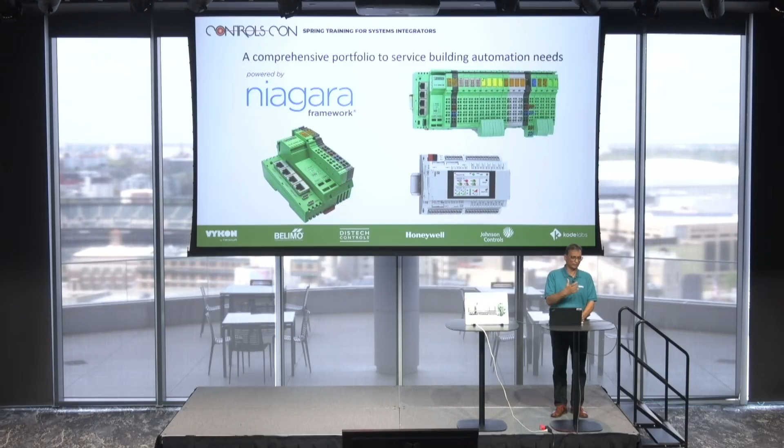The controller that you see here is, in the industry, you are very familiar with screw-in connections, right? We have moved away from screw-in connections, and we have spring cage connections that save a lot of time in wiring and putting the cabinets together. And don't be mistaken thinking that, oh, okay, spring cage is not sturdy. These controllers are tested for factory automation. So these are UL 508, which is now 61010. So all our controllers are 61010. They're not 916. 916 is a subset of 61010.

So all our controllers are tested for the G15 vibration rating, which is in fact because you have hydraulic machines and you have a lot of high vibration equipment. So our equipment is tested for high vibration. So these spring cage connectors, don't be fooled, this is to save your time.

We have another unique feature in our green controllers, which are ILC controllers, which is inline. So if you're familiar with Phoenix Contact, our existing control offering is called inline controllers. And that is because of the form factor that you can actually snap on the I/O modules. So you can put 63 I/O modules on one controller. And you can network 63 nodes on the same controller. 63 into 63, that's where my math fails, up to 2016 or something. That's how many I/O you can have on one controller.

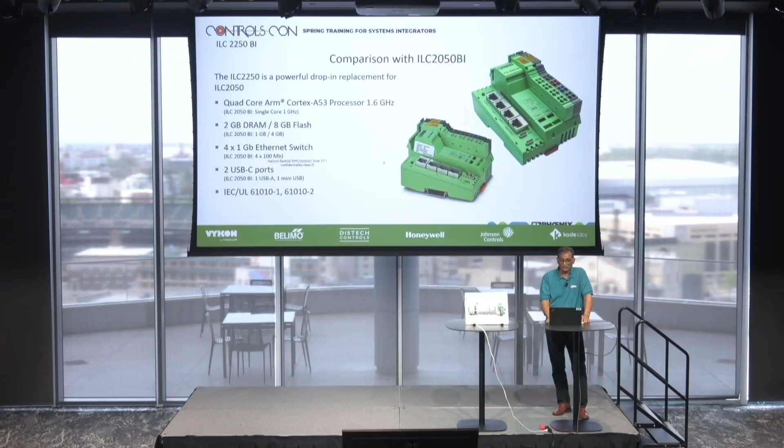So the ports are 2 USB-C. Before, we had a standard USB and a mini USB. Now there will be 2 USB-C ports. And of course, it's UL 61010. Those who have used our ILC 2050 controller, you know that we have a very, very powerful diagnostic tool.

So you log into the controller local host or the server, 172.16.0.10:8080, and that takes you to the web server. You have complete diagnostics capability. Your whole rack shows up, and now you can actually test your inputs and outputs. You can force an input or output and see the behavior.

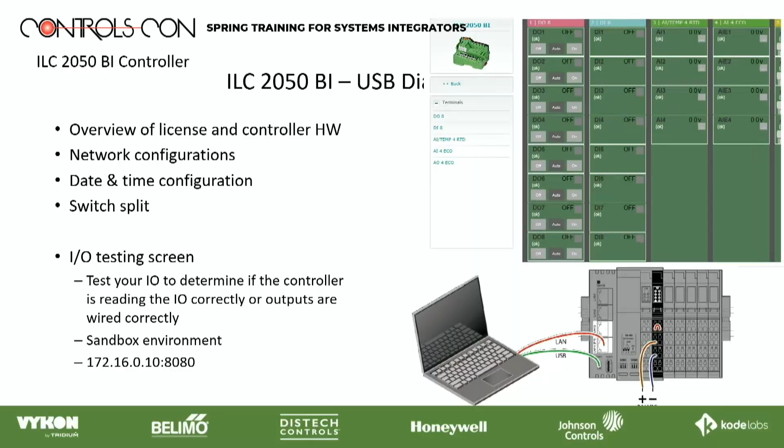That cuts your testing time short. You don't have to put everything on site and then test it there, and there's a problem. You're telling the guys back in the office, hey, can you change this? You can do all the testing in your office, in your lab, and you can save some time from there.

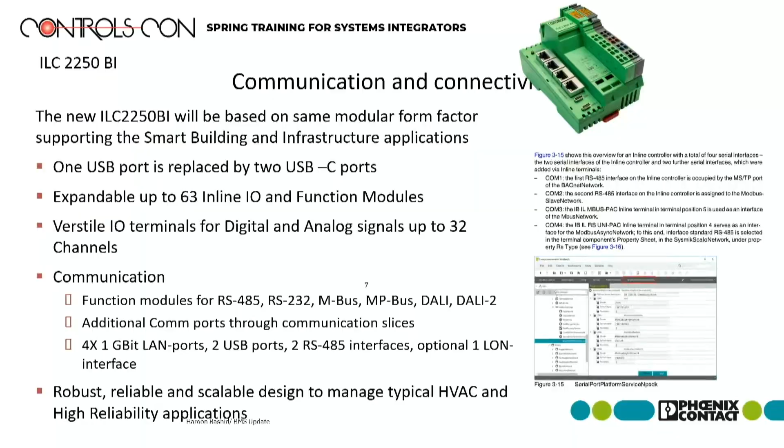I don't want to go too much into this because I have to get to Catan. Some more features about ILC 2250, and then now let's go to Catan. 2250 will be new, but Catan is also our new offer. We launched it actually this January. And this offer is breaking records.

It's very compact, and I'll show you how compact it is. It has 14 onboard IOs. It's a very flexible combination, let's put it this way. You can have up to 6 outputs, you can have 8 universal inputs, you can configure them, all that. It is 62443 compliant, a lot of connectivity, and this controller, again, is 61010 tested compliant.

There are a total of 42 terminals in this size, and as you can see, this is not the standard product as it comes with the display. Display is an add-on, so you can purchase a display. So right here, you see, we have the controller. Controller is recognized by the ports here. We have 3 RJ45 ports here, Ethernet ports.

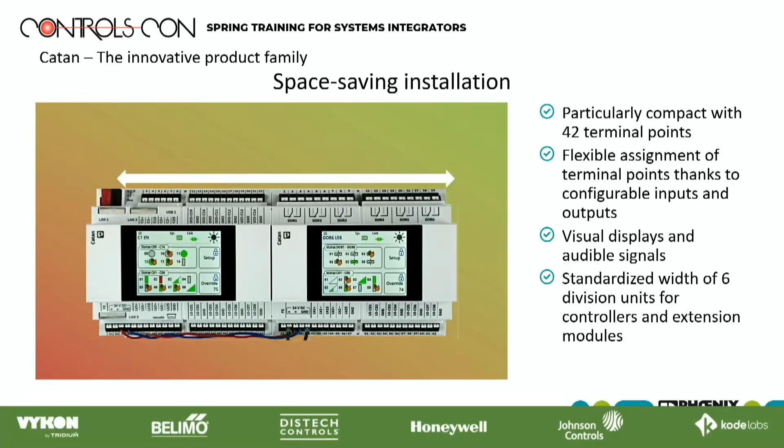And I just removed this cover from the I/O module, and you can just snap in on the USB-C port that you have. And this is a touchscreen 2.4-inch display, and that is the option that you can have with these Catan controllers. In the initial offering, we have 3 products, and that makes our whole offering very comprehensive.

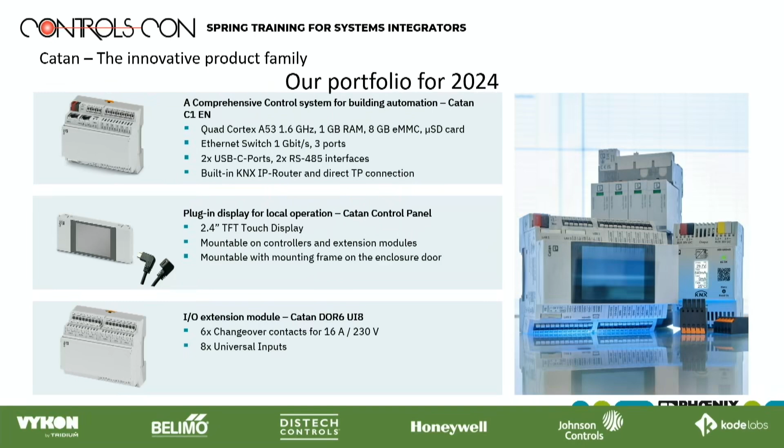The controller itself is a 1.6 gigahertz quad-core processor, and it has 1 gig of RAM. So that makes it, again, very powerful. Then there's an 8 gig multimedia card. It's a memory card. You can have 8 gig of flash memory, plus you have the SD slot.

And somebody will ask, can I use an external SD card? No, the micro SD card has to come from us because we installed the Niagara image on it. So whoever asked that question, you have to purchase the micro SD card from us. But you can have up to 32 gig of micro SD card. So with 1 gig of RAM and 8 gig of MMC, it's a very, very powerful device.

There are 3 RJ45 Ethernet ports, so it's also a managed switch. So a 3-port managed switch in itself brings a great deal of value, because how much do we get a 3-port managed switch for in the market? A managed switch, probably $200-300.

The universal IOs, you can configure them 0 to 10 volt, 0 to 20 milliamp, or you can configure them as digital input. And then there are another 6 which you can configure as 4 universal inputs, or digital inputs or outputs, and 2 analog outputs. So there can be 2 analog outputs and 4 digital outputs, so a total of 6 outputs, just in this form factor.

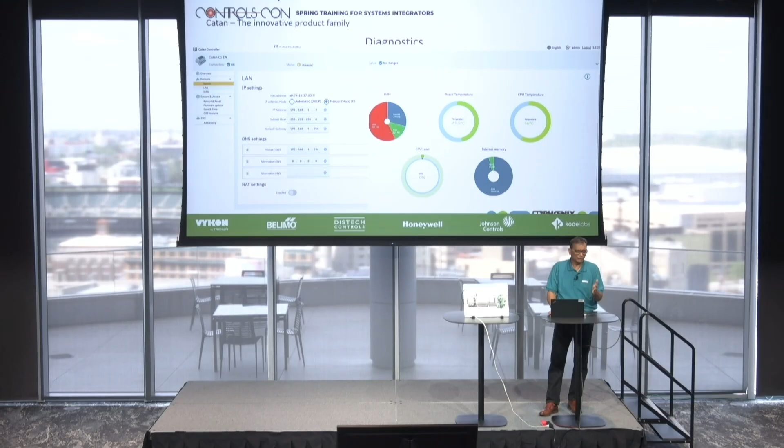A lot of saving. I talked about the diagnostics in the previous controller, the green ILC 2050 controller. This controller has tons of diagnostics. So if I get a chance afterwards, I'll show you the diagnostic page live. You see that this gives you the CPU consumption, the temperature, memory consumption, and you can configure, because I said it's a managed switch, you can change the IP addresses, you can have it dynamic, or you can have it manually configured. So this is very powerful.

You can also do firmware updates. You can set the date and time calendar. You can also actually set the software update schedule as well. So you can do a lot with this diagnostic tool that comes with it.

This is the smallest. That means you have a retrofit job, you have the controller with 1.6 gigahertz, same power or more power, and it is smaller in size. And you have 14 onboard IOs. You can bring it in and drop it into your cabinet, because both controllers, the green ILC and the Catan, program with Niagara Workbench. We do offer some additional libraries that I am going to go through, but if you have any Workbench that you're using, you can create a station and drop it in there.

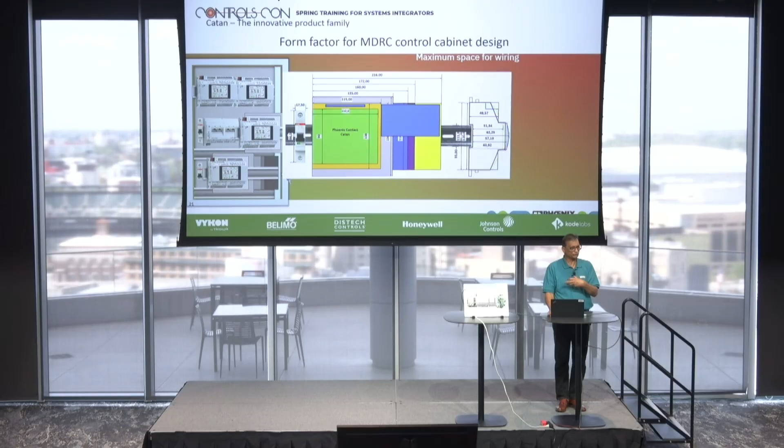There are some additional libraries that I'm going to talk about; if you download the jar files or Emalytics module from our website, you'll get those libraries, or most likely they will come with the license, the supervisor license.

This is what I wanted to show: if you want to secure your cabinet and you don't want any unauthorized, unintentional access to your controller, you can actually mount the display externally on the cabinet door, and you can lock your cabinet so nobody has access, because this does not give access. This is also PIN protected, and it does not give access to the technicians on site unless they are authorized to do that. So you can only change the set points and look at the values. Like you can see here, there are some values in there.

This is what we offer in Emalytics. Emalytics is Niagara. For those who have not heard of Emalytics, Emalytics is Niagara. It's our brand name of Niagara. If you want to work with our libraries, we have a very large set: we have HVAC, room libraries, as you can see here. We have DALI libraries.

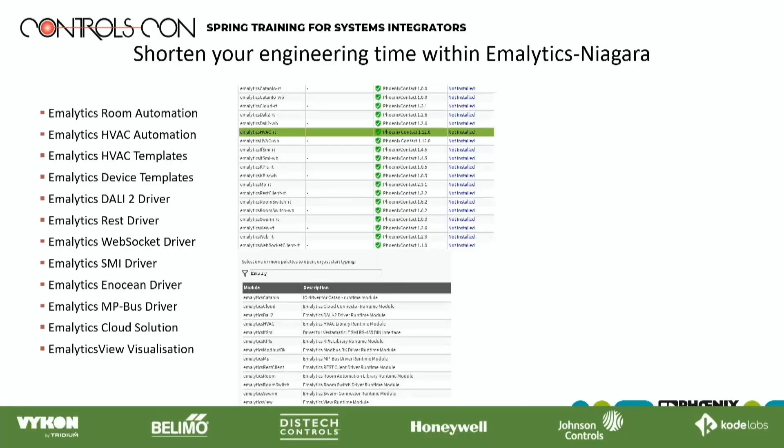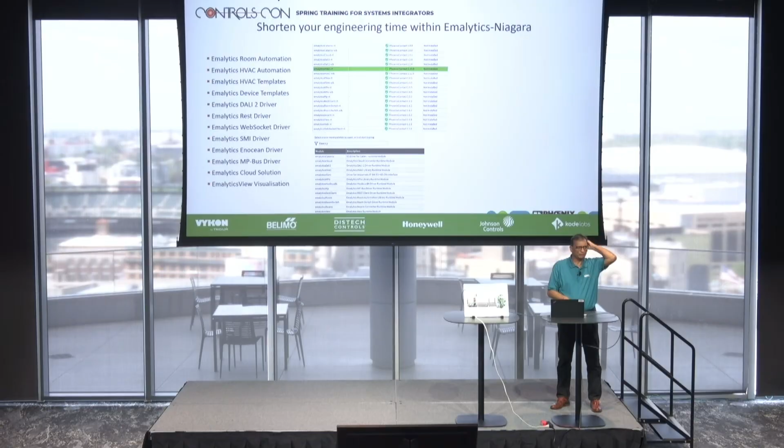DALI is not as common here in the United States. Has anyone used DALI yet here? For lighting automation, it's very much used, as is DMX. The gentleman previously was talking about DMX. These are all protocols that are used largely in Europe, like KNX. EnOcean is now coming here. KNX is coming here. EnOcean has an office now in Florida. So they're trying to introduce their technologies, the protocol, here in North America.

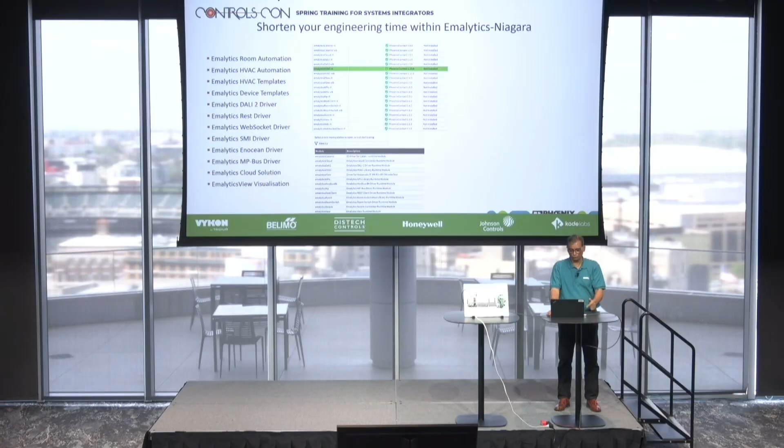So these are all the libraries that are available, room automation. We also have the graphic accelerator or PxView Accelerator. This is all done within Niagara, so there are no external tools. What you have to do is go to the software manager and install or activate the runtime files for those tools, like Emalytics or Niagara, Phoenix Contact, Niagara libraries. If you have not installed them, then they will not work.

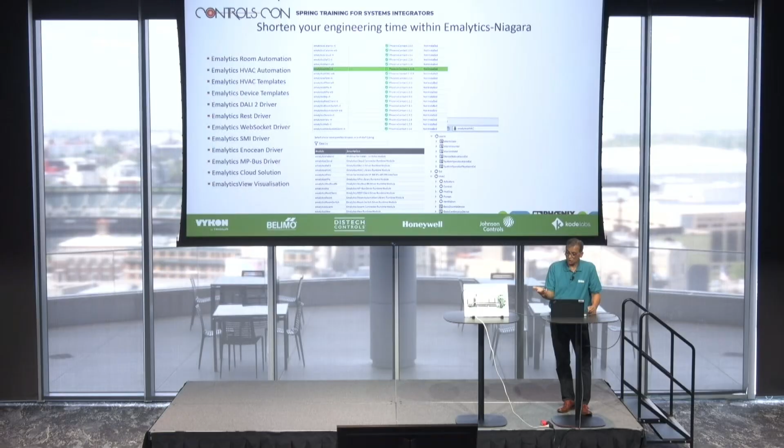If you do that, then we have HVAC, room automation, REST. Actually, we have Cloud Connector as well, with 3 components to it. We have the data access, we have the control, where you can switch the device on and off, and you have the data logger. All these tools are based on JSON, and they are available within the Emalytics libraries add-ons. We also have digital twin dashboards. These are all built with Niagara tools.

The advantage that you have is that they are free, but they are tried and tested by us. They are qualified, tested modules. You don't have to develop, and this saves a lot of engineering time. You don't have to develop the tool yourself and do the testing. We have done it already. And if you have developed dashboards in Niagara, you're probably familiar with these. We have already done these and tested these.

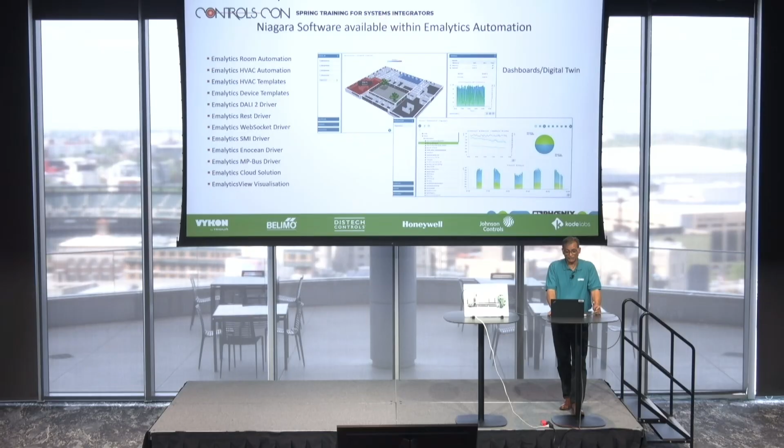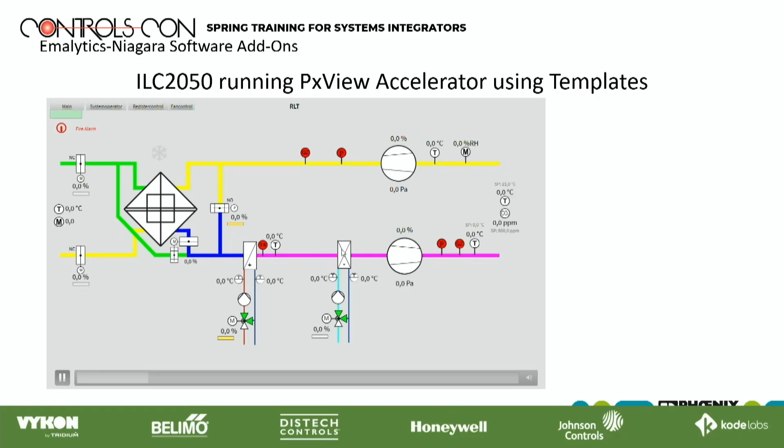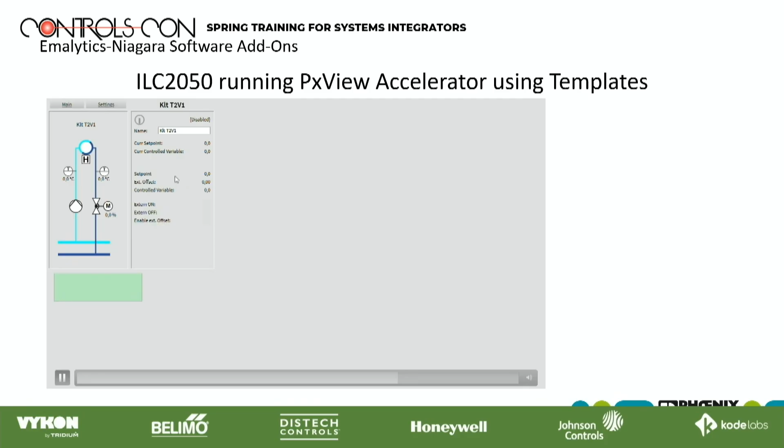Then we have the PxView Accelerator. This is basically a library, a group of templates that we have put together. They work seamlessly together. There are smaller components, smaller templates, and you can integrate those objects together to make a bigger screen, a bigger graphic. As you can see here, we have the HVAC libraries, the graphic libraries, and I'll let the video run. This basically helps you with your development time. These are the tools we provide to make Emalytics Niagara more useful for you.

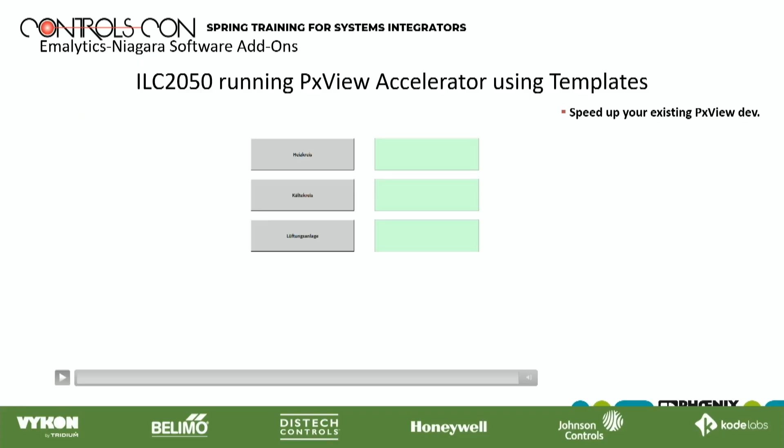One more thing I want to say before I finish is that those who have used Niagara probably know... okay, it's only on my screen.

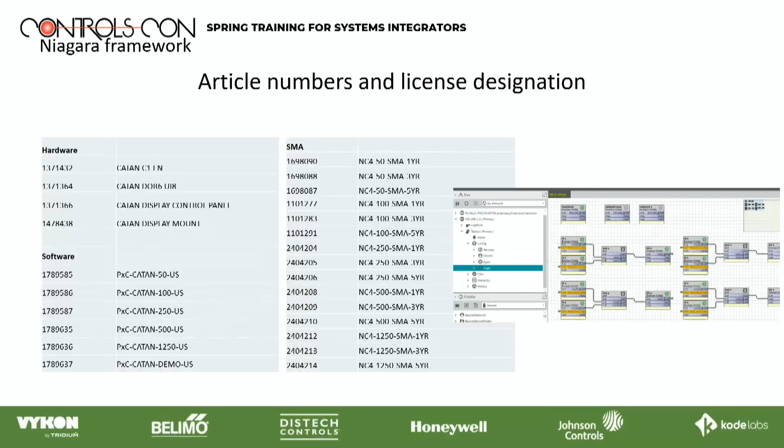The part numbers for the green controller, the ILC controller, are different from the Catan controller. It has happened to me: somebody sent an order and said it's not working. They used the same Niagara license, for instance a 250-point license, for the green controller ILC 2050. We have created new part numbers for the Catan controller, with 5 designations: 50-point, 100-point, 250, 500, and 1250. When you are ordering a Catan controller, you have to order the Catan controller license. SMA, however, is the same.

Okay? So with that, any questions? So Haroon did perfectly. So I was right on time? You've done a great job. Actually, you had 5 minutes to spare, Haroon.

We can go into the workbench, but you guys are all programmers. What I was showing in my slides are screen captures. You go to the palette library, type in Emalytics, and you'll get the whole Emalytics library: HVAC, room automation, PxView, and the templates. We have templates for Belimo. You all know Belimo. They are built into Emalytics, which is our version of Niagara. All right? Any questions?